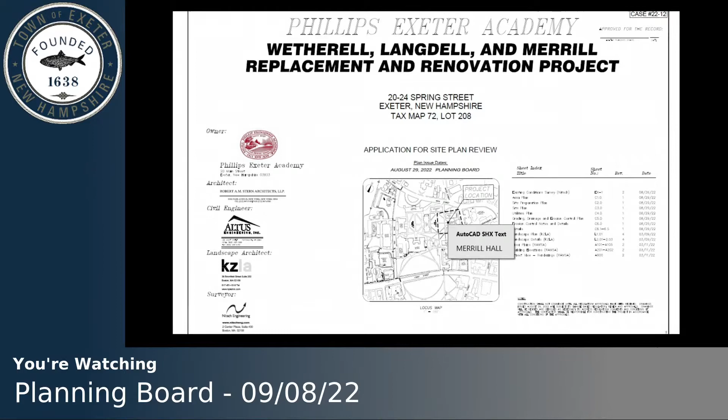Dave gave a pretty good summary. This is the Wetherell, Langdell, and Merrill replacement and renovation project, on tax map lot 72-208, an approximate 11.4 acre lot. The lot is bound by Front Street, Tan Lane, Main Street, and Spring Street, so basically the entire block is a single lot. This portion of our site is located in the northeast portion of the lot. It's 3 buildings, but they're all interconnected as one building: 2 dorms on each side, Merrill and Langdell dormitories, with Wetherell dining hall situated in between the two.

Wetherell, the buildings were built in the 1930s. There were some renovations done in the 1960s to the dining hall. I'm not going to get too much into it. Heather's here to talk a little bit more about the actual building and the programming, so I'll pass it over to her. She'll talk about Phillips Exeter's programming for the dining hall, why they're doing the project, and a little bit more about the building itself, and then I'll get back into the site work and the site application and a lot of the design features for the project.

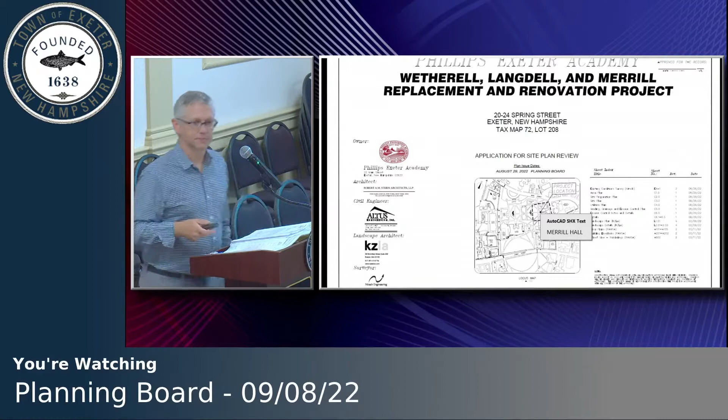Thank you. Heather, you're up.

Thank you, Corey, and thank you, Mr. Chair and board, for having us here. We're thrilled to be here. We're very excited about this project.

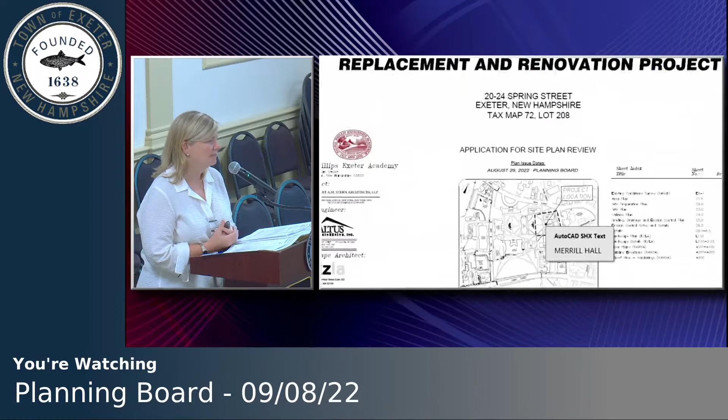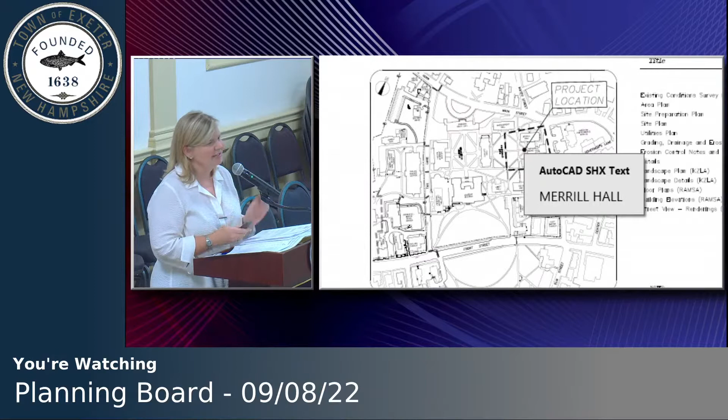It's another large project that we're doing on campus, but we are so fortunate to have so many of the Cram and Ferguson buildings, the buildings that Corey talked about that were built in the early 1900s, and this particular one in 1932, and as he said, expanded in the 1960s for the dining hall portion. The good thing about these buildings is they have good bones, so if we do comprehensive renovations of systems and envelope, they can serve us for decades to come. These buildings have not really been substantially renovated in a long time, and are due. As Corey mentioned, this project is a combination of the renovation of 2 dormitories, and Wetherell Dining Hall actually began its life as part of dining for each of those dorms, then in the 1960s it became one of our 2 main dining halls on campus, and so it was expanded. One of the challenges is the fact that it does go out close to Spring Street, and the renovation of this will much improve that situation.

This is a plan of the site, focusing in. This is Spring Street here and Water Street. So when you come down, you look in and see Merrill here - this is one of the dormitories, this is the second dormitory, and this is what will be the footprint of the new dining hall within. Corey will talk in detail, but it is pushed further back than the current condition from Spring Street to allow for a full loading zone where you can pull off the street.

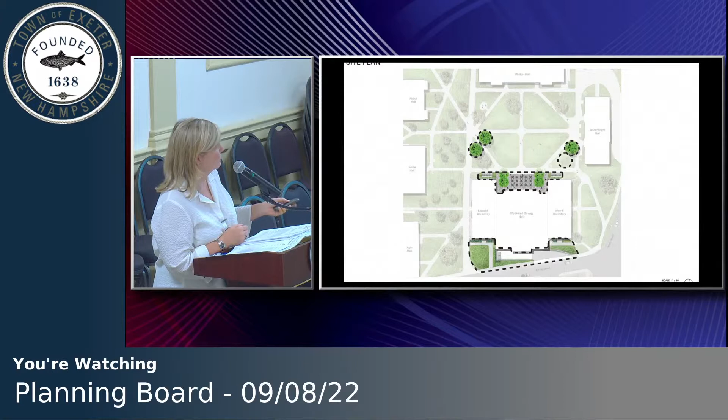So the areas highlighted are those of the site that are being altered. Again, it really focuses around the loading area and the Spring Street face, as well as on the quad side, where we're adding a terrace. One of the things we're doing is making the first floor of each of the buildings accessible, because at this point you have to go up 4 or 5 steps to get to the first floor level.

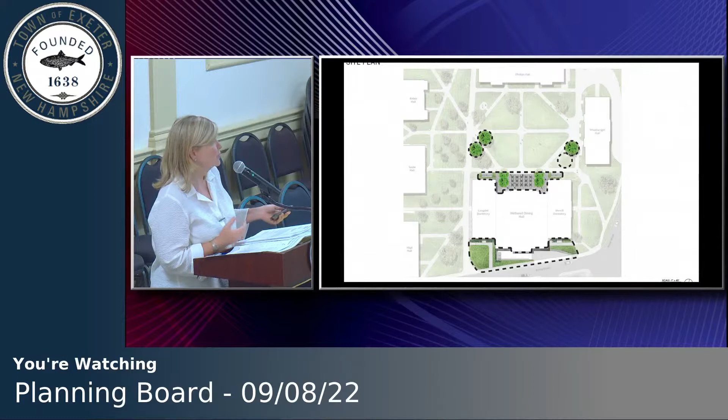We're raising the whole first floor so the new dining hall will be in alignment with that first floor. There are ramped areas that come up, so it's ADA accessible to get into the first level of each building, and you'll be able to get into the dining hall all on that level. That's the major site work. It's not a lot of change. We will clearly disturb our quad in the process, but at the end, there's not a lot of change.

Uh-oh. I don't know what I just did.

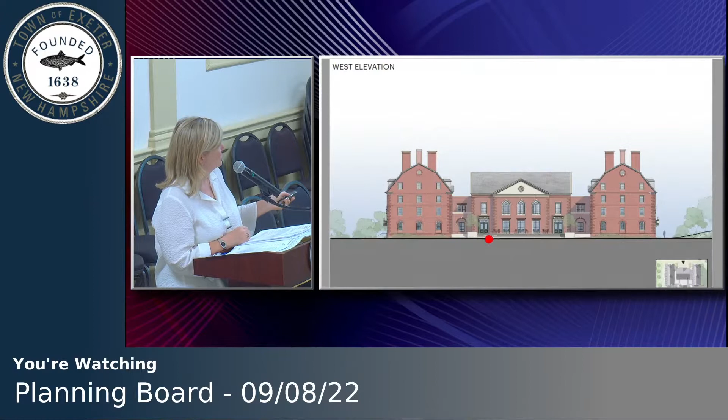Some elevations of the new building. These are the flat version of what you would see from the quad. Again, you've got Merrill, this is the new dining hall in the middle, and Langdell on the other side. This shows the terrace and the ramps on the way in. This is the Spring Street side.

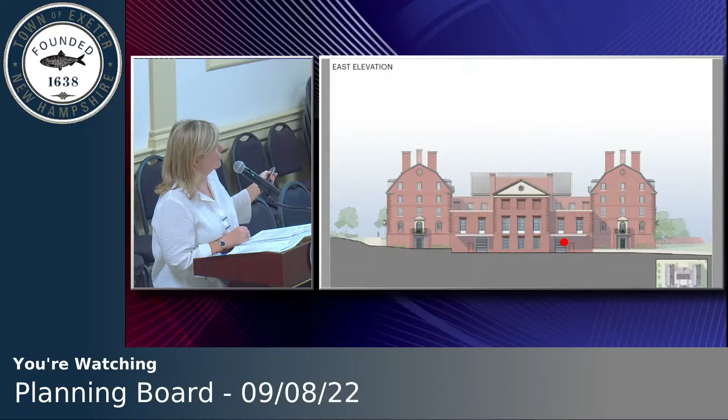The one element that is changing is that we are making an accessible entrance for the faculty to be able to go into the lower level. All of the faculty apartments will be shared on this end of the building. We also have 2 loading docks, one where everything will come in, and the other where the smaller catering trucks will come for things going out.

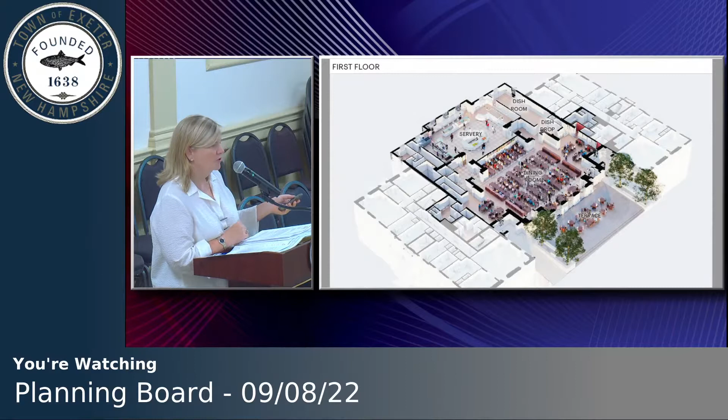This is a section cut across the first floor. Again, you can see the terrace on this end. This is the quad side with ramps that will come up and in. The dining hall is the main space with a servery beyond. One of the challenges we have with the existing building is that the dish room is in the lower level, and we don't really have a real elevator, just a dumbwaiter. So it makes for a challenge. This building will allow us to gain operational efficiency with all of this.

This is a section cut through the building, so you'll see on the quad side what becomes a 2-story dining space with a mezzanine overlooking, and then the servery, the kitchen, loading, and some offices below out to the Spring Street side. The size of the dining hall in terms of seats doesn't really change too much, because right now we're broken up into 3 areas, and this combines it into one area, which gives us a space on campus that we don't have right now. If you know our Elm Street dining hall, it has 2 spaces for main dining, so again we don't have one large space to gather the community in. That's one of the benefits of this project.

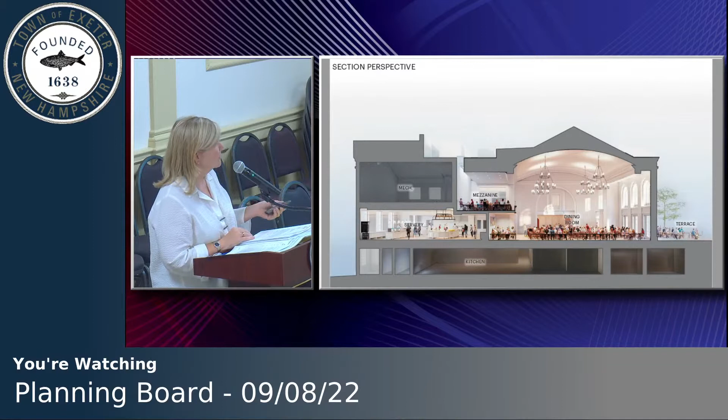And with that, Corey's going to take over for the details that matter on the site.

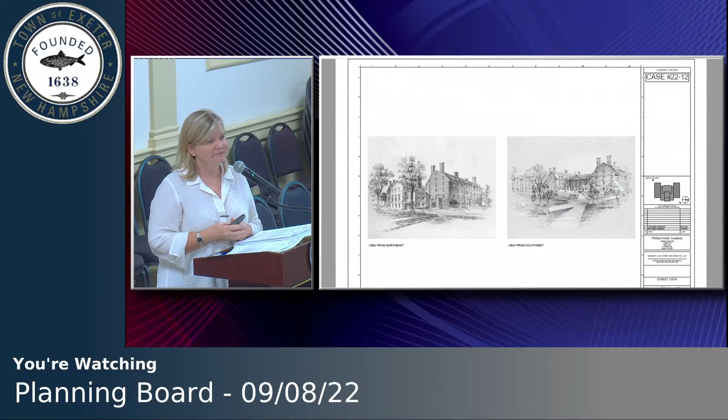Do you have any questions? Any questions at this point? No, we don't. Great, thank you. That's not to say, don't leave.

Pete's thinking right now.

All right, so as Heather was mentioning, one of the key elements for the project is to push the building further back from the street. David mentioned also that right now a lot of the large delivery trucks, when they back in and back up to make their deliveries, they're actually extending out into the roadway.

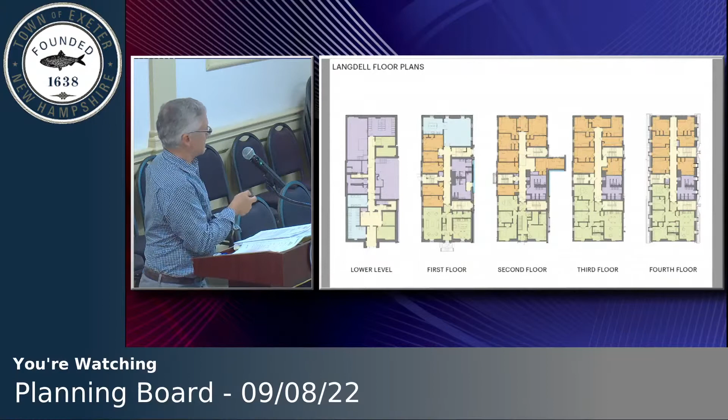Let me see if I added that picture in here. No, okay.

In 2013, we did a pretty comprehensive sewer and storm drain separation project for this building. We installed new sewer connections and storm drain connections. We'll be reconnecting the sewer and storm drain to those existing manholes that were installed during 2013.

We'll be installing a new grease trap for the dining hall just outside loading dock number 1, a 2,000-gallon grease trap. That's based on 720 meals per day, 2.5 gallons per meal served, which would be 1,800 gallons, but we're doing a 2,000-gallon grease trap.

There'll be a new gas service connection. There's existing gas running along Spring Street, so we're going to make a new connection as well.

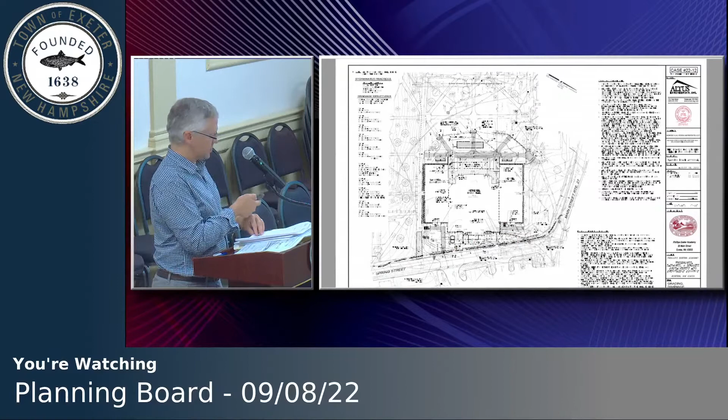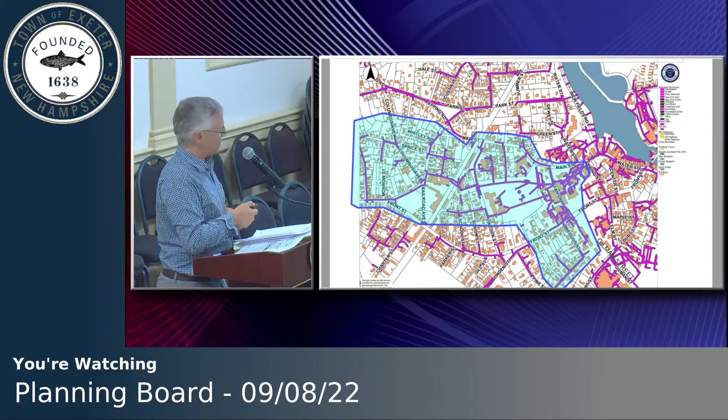This is a larger topic that I think we can discuss hopefully at another time. Working with Phillips Exeter Academy, we've installed a parallel 30-inch line through campus that we're waiting to activate. That's just because there are downstream considerations - you can't send a ton more water down into Main Street to a system that can't handle those flows. These are all topics we can get into possibly at another time, but we don't feel they are part of this project application.

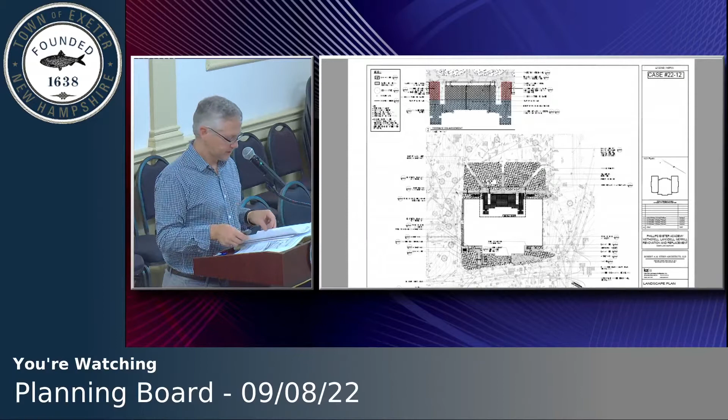So I think that's the end of our presentation. If you have any questions for us, we're happy to answer.

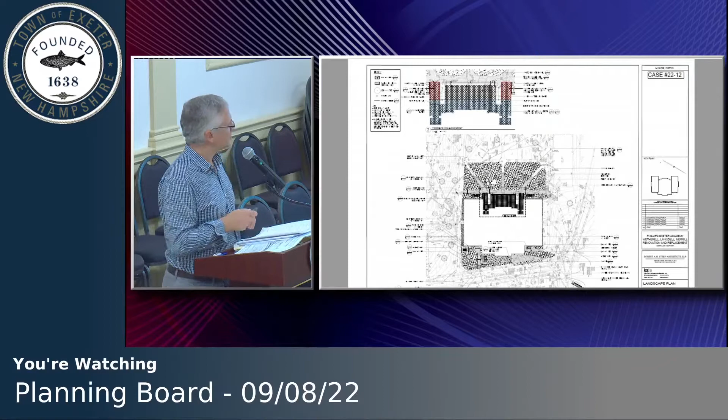Questions? I just want to make sure I follow exactly what you're doing. The two areas where people live, you're remodeling, but the dining hall, to make it 11.5 feet back from Spring Street, are you tearing out the existing dining hall?

Yes. Completely gutting it? You're gutting it, or tearing it down? Ripping it out, new foundation, everything.

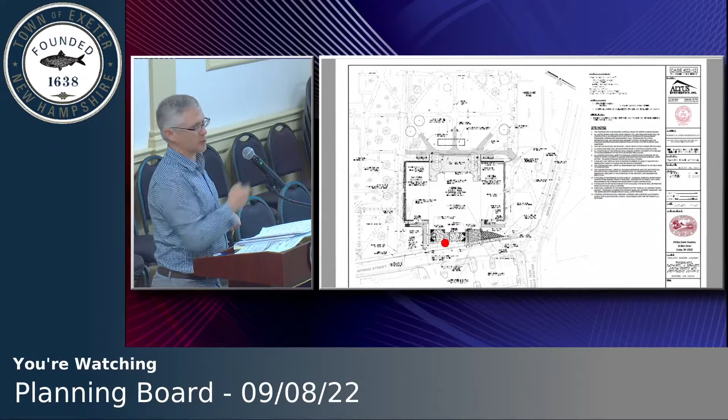Okay, the two dormitories on the side - Merrill on that side and Langdell - will remain structurally, everything, but the entire dining hall that's in the middle here will be ripped out, reconstructed, finished floor raised up about a foot, and redone.

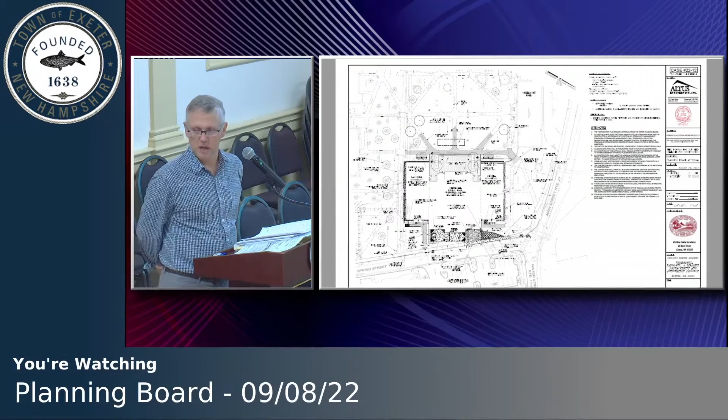How about the connecting walls, the internal walls to the dorm and dining areas? Are those going to remain for the integrity of the building? They will remain. A portion of the buildings are sort of integral right now - the dining hall actually goes into the first floor.

Can you speak in the mic, please? Yeah, it won't be - sorry, being recorded. Yes, no, nobody can hear.

Missed it. So the dining hall is integral into the first level of the two dorms. That's another reason why we're lifting and making it all one level.

In terms of structure, our structural engineer is putting new structure in - we're not underpinning the whole thing because we're lifting it up. The supports are inboard, and the only place we have to underpin is where we're putting in the elevators. So we're trying to minimize that interaction.

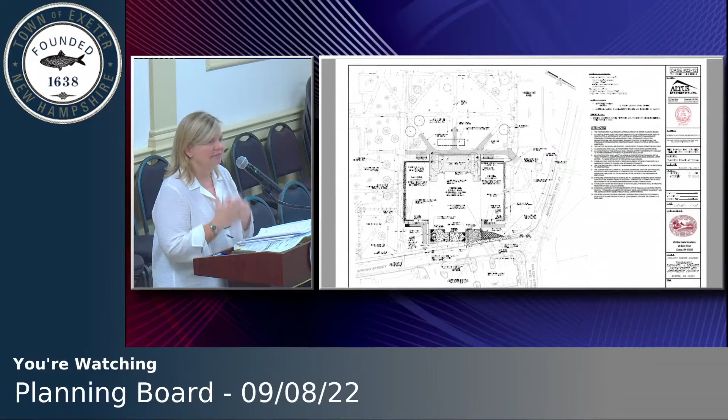We will end up closing a few of the windows on the first and second floor that exist right now between them, but that's all been taken into consideration.

And so then you're going to lose all of the grassy area that's in front of it right now - it's just going to be paved over? We will lose some of the grass area, that is correct, in the... let me see.

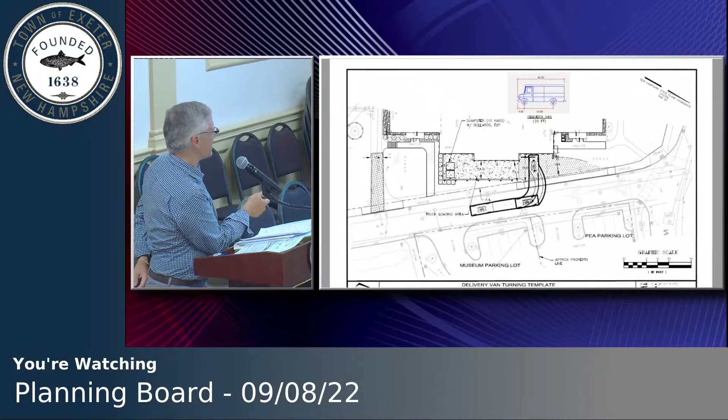I'm going to go to the site. It's hard to see here, but there's some grass areas right in here, a little bit here. It's not much grass, there's a lot of pavement in these areas, walkways, on the other side. I'm familiar with the building, my son went there, I've eaten there a bunch of times.

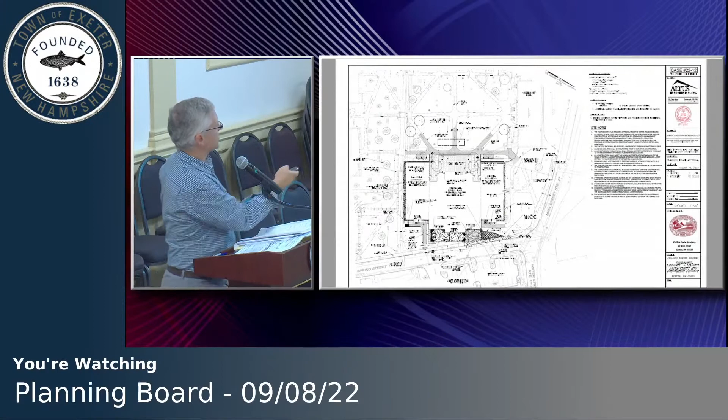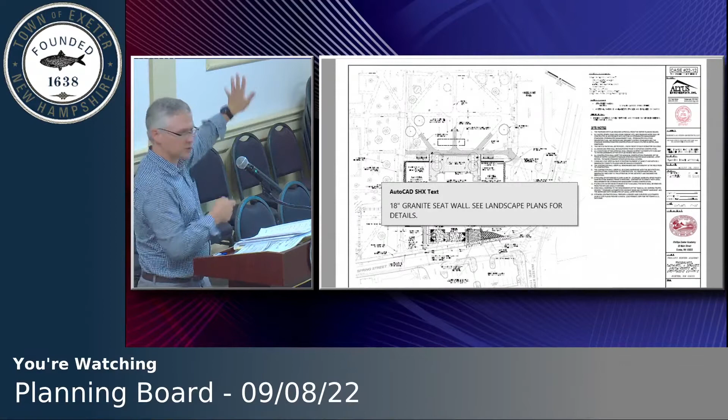I was just curious about the front here, this side. On this side, it's really the terrace just filling in that area between the two buildings. So right here, this area between the two buildings, this will be the new paved area, a terrace, a paver block terrace. It's going to be elevated slightly, but that'll be filled in with planters. The rest of the quad they'll still be able to run around, and it will remain the same.

All right, anybody else? Question — Corey, can you go to the large delivery truck turning template, please? Yes, and thank you. There we go.

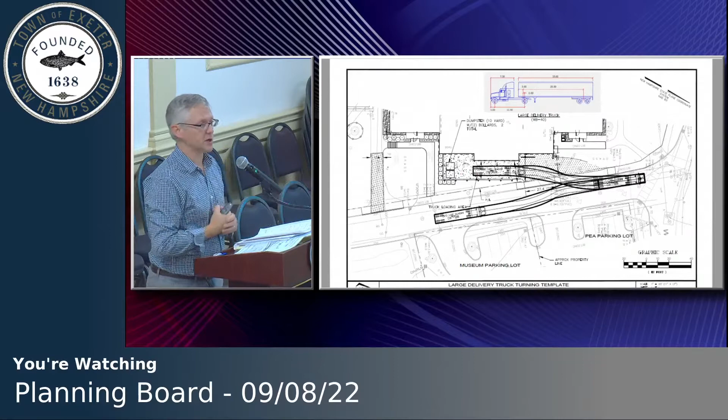I also did not mention that all of this paved — or not, the concrete area in the loading dock — is going to have a snow melt system, just for snow removal. We're going to have snow melt in that area as well, so that'll help with snow removal.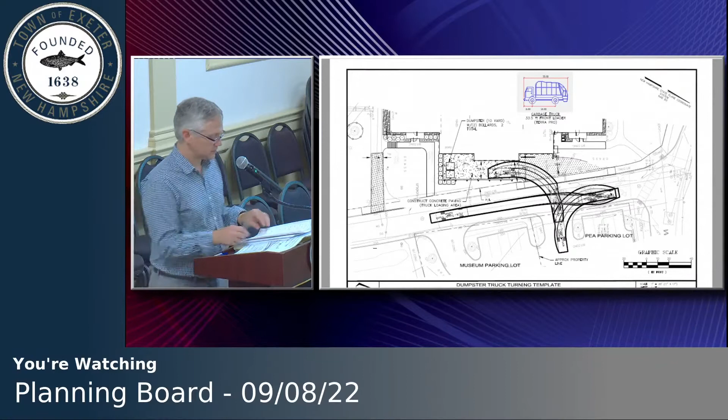And the next one, which shows the garbage truck, that's probably similar to what they do now? Similar to what they do now, yeah. Actually, they have smaller bins right now. So we'll be increasing the bins. Hopefully it's a less regular service. I think the improvement on the impact on Spring Street is probably a major benefit to the general public — that's why I wanted to point that out. I think that's a pretty significant change for the general public as a benefit of the project. I would also throw in the ability now to unload closer to the delivery spot, and for the folks inside to bring in the product.

What did you say was the amount of impervious pavement added or ground covered? A little more than 3,000 — the net total. The existing site has about 24,000 square feet of impervious area. We're adding 3,800, so we'd be at 27,000. We're treating 16,600 to 17,000 of it. We can't capture some of the existing roof runoff that's going down into collection systems already connecting along the sides, and we're not really touching this side of the building. But we're trying to capture everything we can from all of our new construction, and we're also getting basically half of the existing roof runoff added to that.

Are there any portions where it's possible, like the little piece out front, the outdoor dining area, to use pervious pavement? I know you obviously can't where the building itself is, but on the front side, where I think it was like an outdoor dining area? It's elevated. Oh, it's elevated. Okay, right, so it's an elevated paver block system. It's interesting, I don't think I've ever seen it before, it's a little bit different — so that's what this is right here.

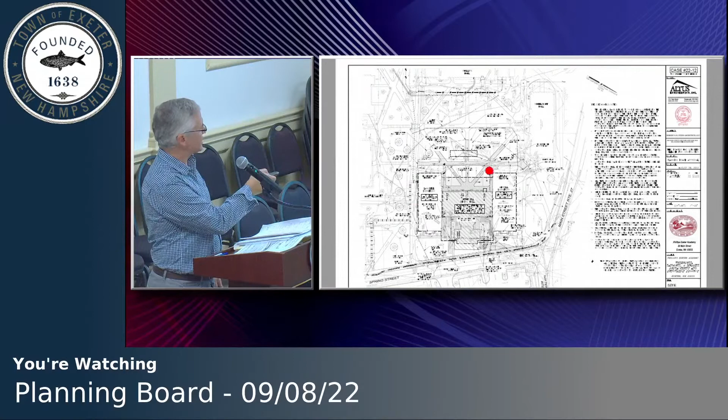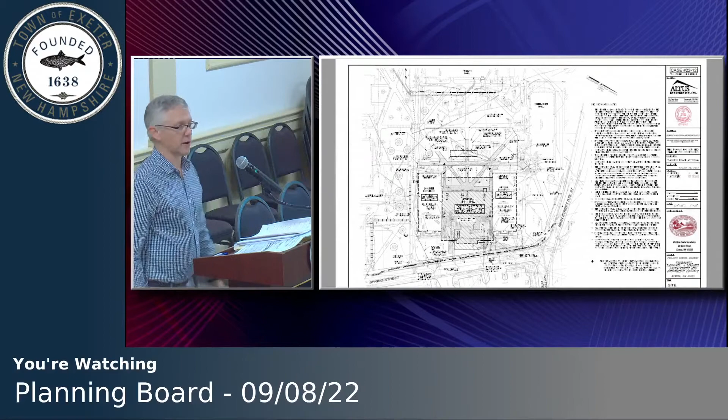So there will actually be a gap, a space between the pavers of the terrace and the ground below. So we can collect that — we have a couple of drains down underneath the terrace collecting the water that goes through, and running that out to the infiltration system in the back, not the rain garden. So we'll be collecting all that as well.

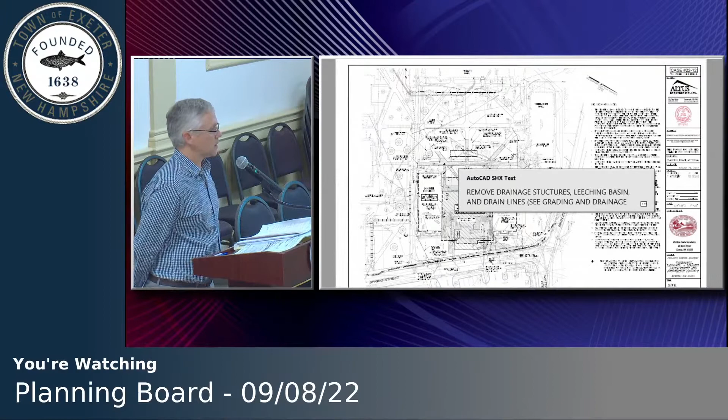Pete, couple questions. For the faculty housing, are you increasing the number of units there so that parking issues arise? She's shaking her head, so there are no parking issues. It's the same - six existing, six to remain. So there's six stalls, twelve parking stalls total, that I couldn't see in the data. They own the parking lot across the street, so there's twelve parking stalls there that will remain the same for faculty housing.

Perfect. And my other question - I have to ask you to go back to your filing letter, which will take you a while to find. It's basically the letter you submitted, the very, very first one. I don't think I have that one with me. Well, I think I only have the resubmittal one. It's dated July 11.

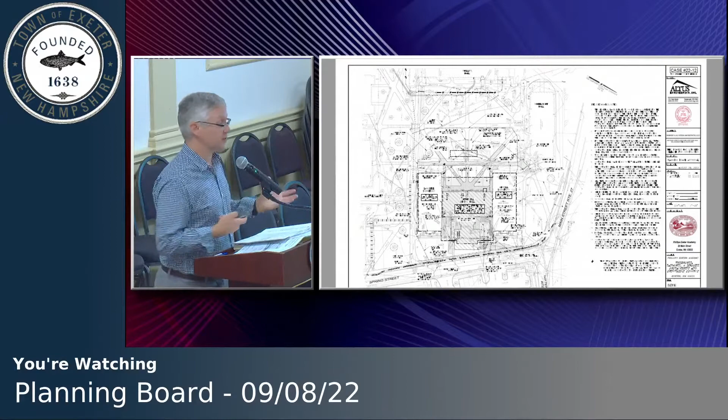There's a part of a sentence in there which puzzles me a little bit. You're saying that to raze the existing Wetherell dining hall, to construct a new dining hall to meet campus needs, and renovate both Merrill and Langdell Hall to provide updated student and faculty housing that meets - and here's my question - meets current building codes. Now, in other words, right now things are not meeting building codes? So, well, all of the existing dormitories that were constructed - 1930? So I wouldn't... and then all the electrical systems, everything - if you construct new, you have to construct to new building codes. So everything will be constructed to meet current building codes. But my problem is that sentence saying that right now the student and faculty housing do not meet current building codes?

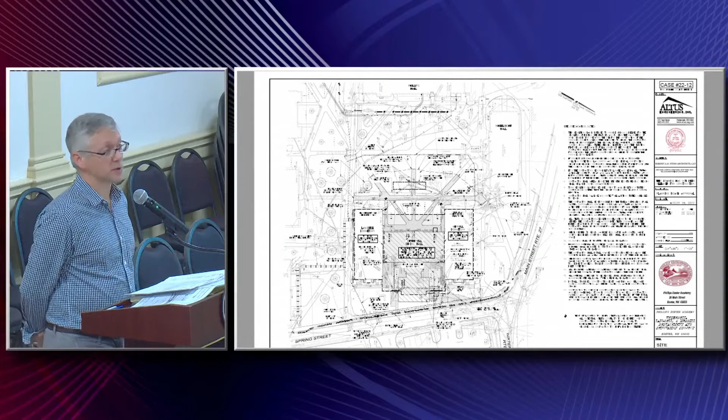It's just a sentence that troubles me. If anybody else can find it - I'm looking at it, yeah, it's right midway down in the middle. Well, I understand your point, Peter, but I don't think he's implying that they don't meet it now. He's saying that the new project will meet current building codes. Yes, or they could be grandfathered if it hasn't been renovated, but once you renovate it you have to upgrade. I think there's certain things that if something was built in 1930, closet sizes and bedroom sizes... We understand, right, okay. But I think he's getting you on grammar. Yeah, well, that's what lawyers are supposed to do. No, he's trying to get you to say something you don't need to say - everything has to have a predicate. Okay, thank you, okay, all right, I'm going to watch myself.

Jen, we haven't talked at all about landscaping, other than a quick sketch. There's not much landscaping. I think my only comment about the landscape plan is that I didn't notice a plant schedule or any particular species noted on the plans. It just says deciduous tree, shrub. Typically that's something we'd like to see - we like to be able to review what is going to be planted. Is it on the L1.01 landscape plan in the set? Sorry, now I lost it.

Somewhere you mentioned in the notes that some trees were moved so they would not be over utilities. Right, yeah, we did receive some comments on the tree locations during technical review. Those have been revised to make sure we are showing them away from utilities, so these reflect that. Yeah, I'm not sure if we know exactly what species of tree - I think it's left fairly open as far as which type of tree will be planted. I personally would want that to be a condition of approval, that a planting schedule is included on the final plans. That would be my recommendation.

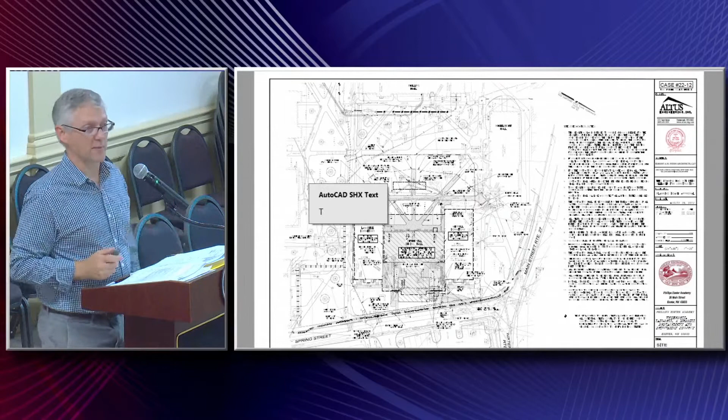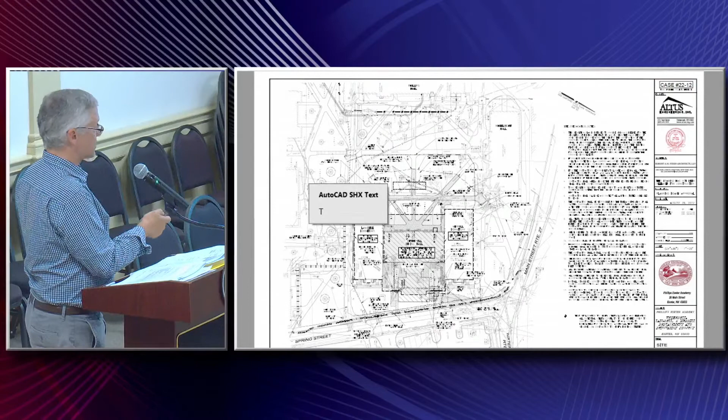Well, I forget what year, but I think it was around 2013. There was work being done at Phillips, right over here—this is Wheelwright Hall. We installed a 30-inch trunk main parallel line that comes up the building, up the side of Wheelwright, crosses over, and then comes up to Tan Lane. Everybody knows what happens on Tan Lane during any significant storm event—there's significant flooding there.

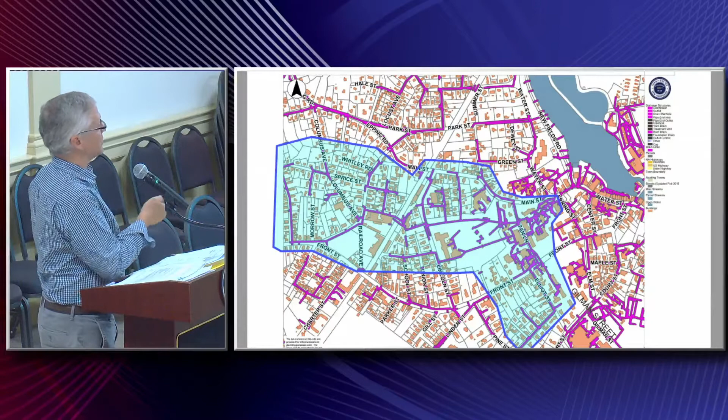Certainly, when I go back to this—this is from the town's data, all the purple lines are storm drains. This is Tan Lane right here. This is our site right here. This is what's draining to Tan Lane.

So again, we've installed another 30-inch storm drain line that comes up to here, but it's not connected yet, and really we can't make that connection because the existing drain line that goes down and outlets to the Squamscott doesn't have the capacity to handle that additional flow. So there's some coordination that needs to happen between the town and PEA, looking at this drainage system holistically before that happens. I really think that's a separate project from this one, and that's what I was trying to elaborate on in that comment.

Does that answer your question? Yeah, I'm just trying to get you to elaborate a little more on that, because it's a pretty important part of the project and the overall scope of what's going on within the town—planning ahead. This is the time to do that in that area. Very logical.

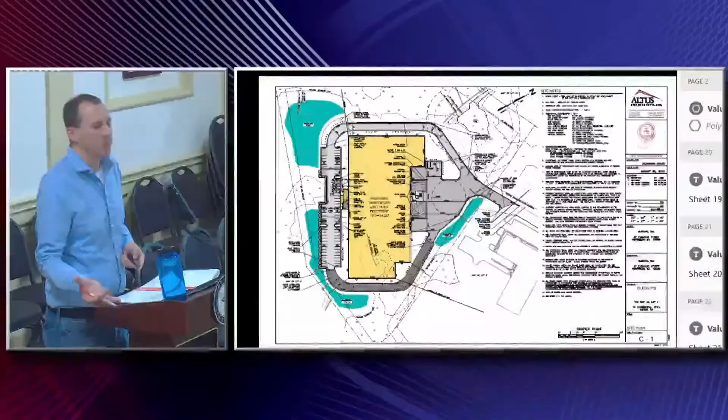There was also the addition of one note on the utility sheet about water main testing on the existing main extension from Continental. Basically, they have to coordinate with DPW. That satisfied Underwood's last comment, so the town engineer has signed off on the project as designed.

Jen, you missed the landscaping chat last time, so I was going to have Vicky here, but sorry. Do you... We can still chat. Okay, do you want to talk about it? We can still talk about it. So at this time, any questions?

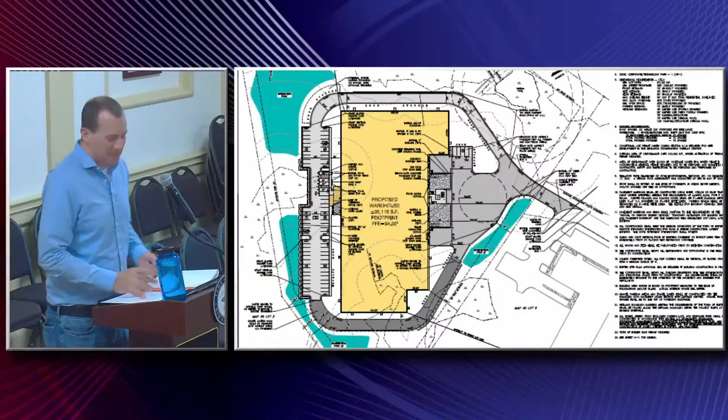So where are we at here? Questions? So the only real change is that the parking lot's paved. That's it, yeah, and of course that rippled through every single sheet on the plan set. Simple.

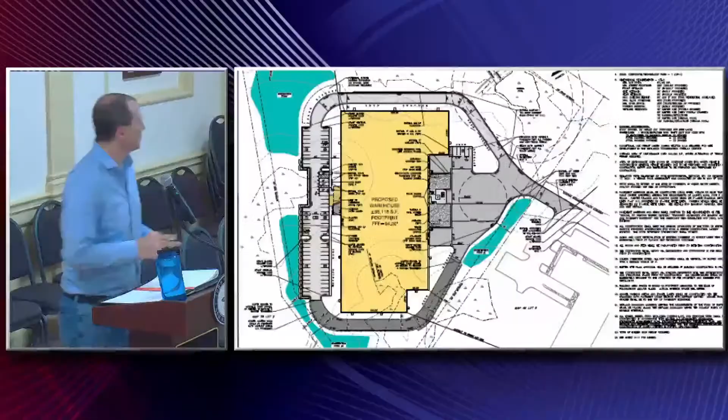Jen, did you have any? I do have a few questions, and I'm sorry I couldn't be here when this was originally presented. But I did watch the video, and I went out to the site this morning. I just walked the old Garrison, the road through it. Yeah, I didn't venture into the tricky spots. It's beautiful out there. So one of my questions was about that easement, the existing easement that goes through the Garrison Lane easement, or the discontinued road.

Oh, the road. The road is totally discontinued. That was done several years ago, I believe, in conjunction with the rest of the industrial park.

So there's no easement at all, no right of way, anything like that anymore. I guess that was my other question - it does look like it's a pretty well-used trail. Is there any possibility that the applicant could have the trail go around the building so people could continue to use it?

I don't know, Barry, what do you feel? It's a very well-used trail, but if you go about halfway up, there's one that dives off to the left. That one's beautiful - and that allows you to get all the way around? Yeah, it goes in, and then you go along the river and over a bridge. I think people are going to make their own path if they want to, and with the way the site is designed, it's going to push people around anyway.

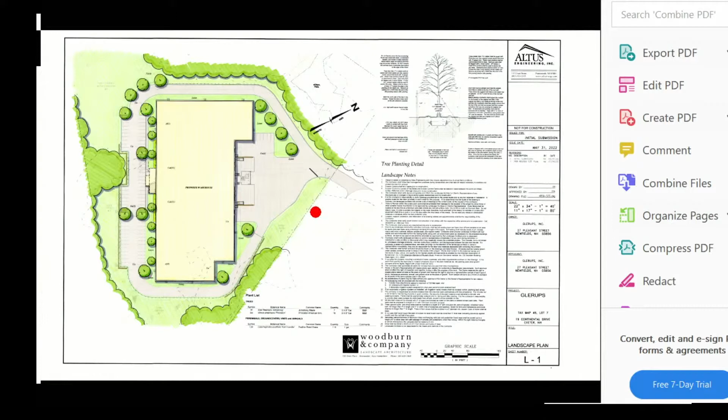This whole chunk in here is the big snow storage area, so it takes all the snow from in here so we don't dump it over the side. I do need the grass in there as well to stabilize it. And in changing the perimeter road to gravel, these sections here are actually sunk down with drainage features in them, so that's where the water's going to go. I can't put any mulch or other stuff in there.

So you're using the grass to help direct the flow of stormwater and keep it stabilized, so it doesn't wash away - snow water and whatever.

Huh, that's interesting. I don't know, we've heard that one before. How about you, Jim, heard it used that way? Yeah, that's kind of a New Hampshire thing. Well, it's better than black plastic, I think.

I think rain gardens, stormwater detention basins, and bioretention areas should be planted with plant material that actually has deep root systems to absorb the water.

New Hampshire's moved away from that in the past 10 years - you used to do it that way. There's something with vermiculite affecting phosphorus export or something like that, something crazy out of UNH. I don't exactly get it, but that's exactly what it is - contrary to the way the rest of the world does it.

But those areas I just talked about are not the actual stormwater treatment facilities - let me go back to the drainage plan so you can see where I'm talking about. Those are just conveyances. Those dark blobs, which don't really look black on paper, are the stormwater ponds.

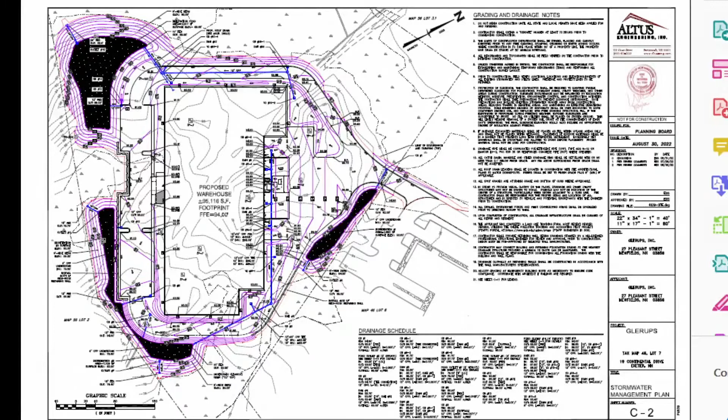Those get the special seed mixes, so ideally in the long term they'll grow up and have a more diverse stand of species in there. I've got a conservation and wetland mix in there now as a head start, and obviously other things will get in there from the outside as time goes on. Those will not be maintained as lawn - it'll be grasses, but it won't be mowed.

I understand it's the low maintenance, easy option. I'd rather see something different. I think it's contradictory, but I understand why it's there - it'll be the easiest thing to keep neat.

And then I guess my only other thing is just the tree selection. I love elm trees, they're great for street trees and whatnot, but in this situation - I was out there today and saw oak trees, chestnut trees, beech trees, I didn't see any elm trees out there. It'd be nice to plant trees with a little more diversity of species, and also replicate some of what's being cut down.

I knew I should have had Vicki come in - I am not the person to answer that. You're obviously the landscape expert, and it obviously runs in the Martell family. We're not related - I know, it's funny, weird though.

I just know that she chose those for the shade on parking areas because they're going to be tall and columnar and have a nice canopy. She did mention they're disease resistant, and that's about all I get out of her. So, yeah, I think it's...

Do you want me to have her switch some up? I don't have a preference. How about the speed of growth in terms of - those are hardwood trees.

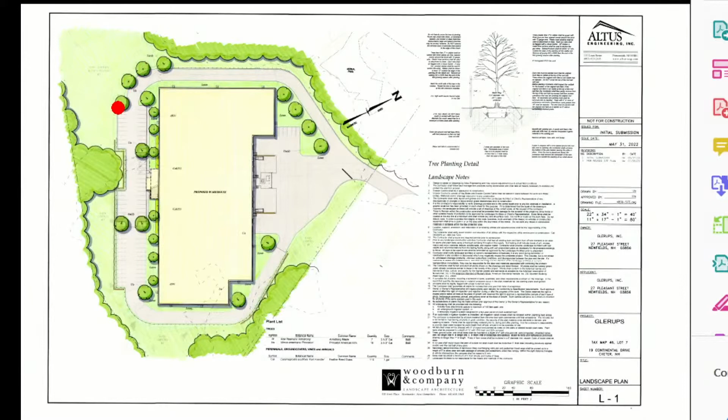Probably not beech, because then they have suckers. Beech won't do well with any... I'm assuming this whole area will be salted too, so we need to be a little cognizant of that.

There's a lot of considerations that go into selecting trees. My concern is let's try to use some of the trees that are already in the forest. I would love to see some evergreen trees put in too, since there's probably a 50-50 mix of evergreen and deciduous out there today. And maybe not all the same species, because if you plant 15 of the same tree, sure they're resistant to Dutch elm disease, but there are other diseases that could hit them, and then you've lost 15 trees. So it's nice to have a variety.

As a condition, I can have Vicki take a look at this and have her change some things up, adding some tree variety. I think in her thought process, if she's seeing an industrial site where the public's not really going, it doesn't need to be dressed up that much, so it's probably just trees and that's it. But I can definitely pass that on to her, and she can turn it around in no time.

Welcome to Exeter and our trees. It's called Tree City? Tree City, yeah. Tree City, USA. Yeah.

Okay, anybody else? Comments, questions? Dave, you look questioning. No, I didn't have a question.